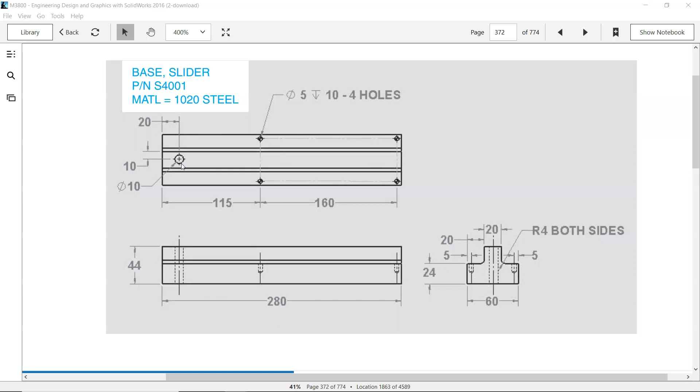We have the 4-hole spacing, the through hole, and we're going to create this line to line, but there's going to be some geometry that we're identifying as critical dimensions that we'll want to address.

So we'll go into a new metric part. If you haven't created a custom template for the part inch and the part millimeter, I still recommend that you do that.

We'll let this load, and then because of the orientation, I want it to be able to come into the assembly kind of like it looks in the isometric view or like it looked in the part. So we'll start the sketch on the right plane.

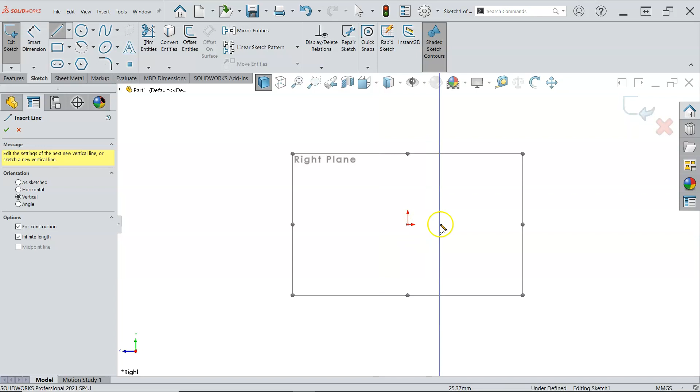Anytime I know I'm going to use symmetry, I'm going to go ahead and put in a center line. So line with a little arrow, grab the center line, vertical infinite length, so I won't ever run out. And then we're going to drop it on the origin and see that little yellow box for the coincident.

Getting out of it, I think I have better luck just going ahead and right-clicking and selecting, or hitting escape to get out of the command, rather than unpicking those buttons and trying to figure out what I'm doing.

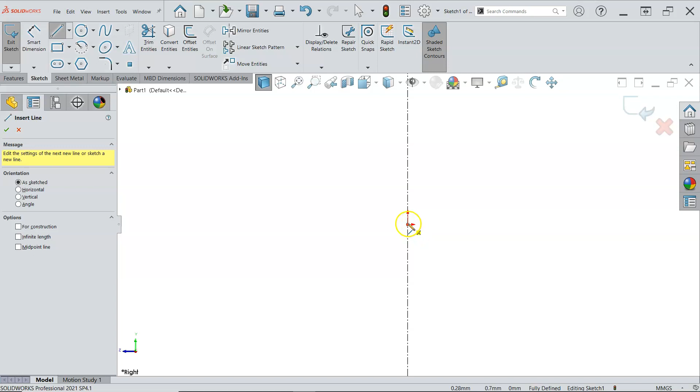So if I hit L on the keyboard, that will put me back in line as sketched, and then I can start drawing. I'm doing the click drag, so about there.

I'm loosely watching the dimensions, and we get back to that point. I can right click and select again, using the middle mouse wheel to zoom. I'll go ahead and complete the mirror.

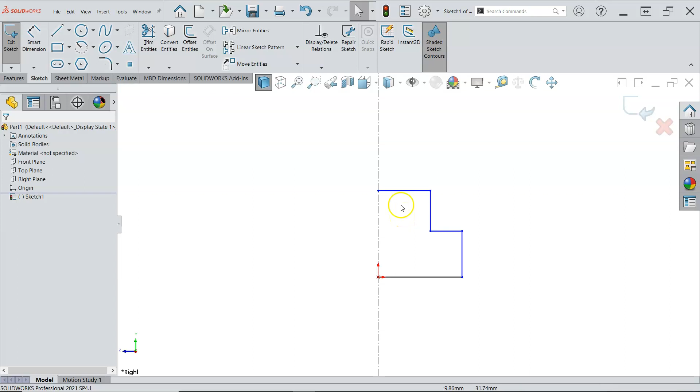So the center line has the functionality that if I were to revolve this, I would end up with a circular shape, but it also has the ability for the mirror.

So if I just click mirror, I have a habit of pre-selecting. So if I window picked from right to left and just hit mirror, I would get the mirrored objects pretty much instantly. It's not letting me window pick, so if I grab these

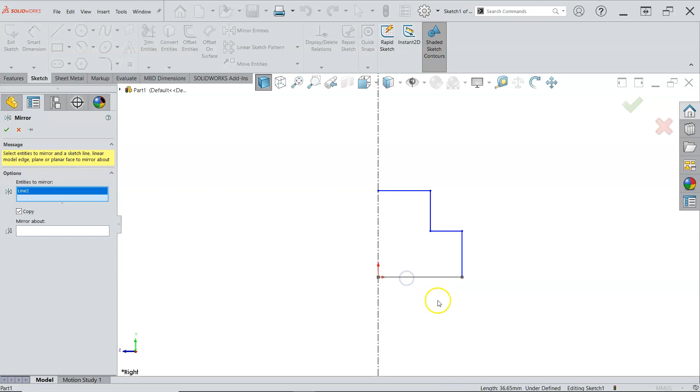single one at a time, make sure these are highlighting, and I'm going to mirror about.

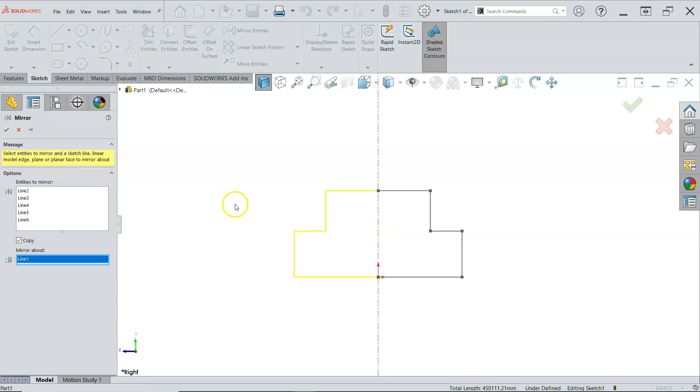One thing with the copy is if these already have dimensions and relations, the copy will bring it over and leave the original. Unchecking that will do away with all of this, and if there are dimensions and relations, do away with them as well. So be careful with unchecking the copy.

There's been times where, for whatever reason, I wanted it to go the other way, and rather than deleting this geometry, I would let it go ahead and copy, and then when I do the window pick, just change it to construction geometry if I wanted to retain it.

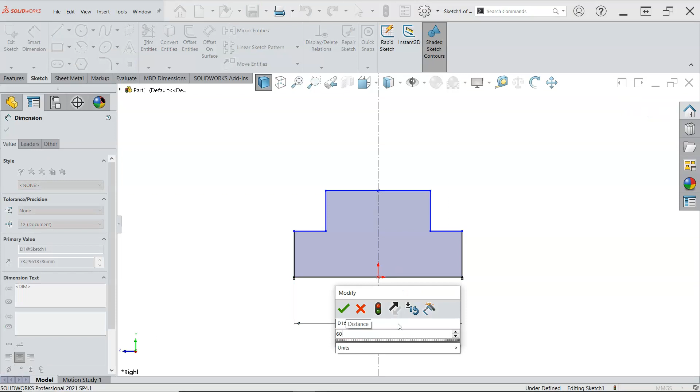So now I have my shapes. We're going to be 60 millimeters overall, and I'm not worried about the scale.

Let's see if my geometry, we go 24, and then the overall will be 44.

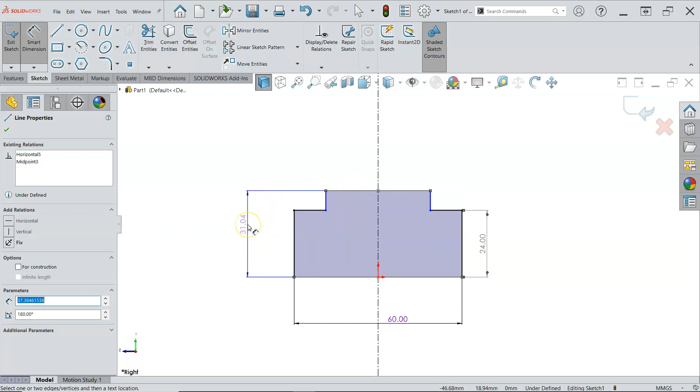So this is one of those instances when I'm picking dimensions, I like to pick the object first, and then second would be between two objects where it's not otherwise convenient.

In this case, we can pick on the object, 20 millimeters on the width, and that gets us a fully defined sketch.

So if I right click and go back into select, my next choice is, do I include the radiuses in the sketch? I don't think it adds anything, or that I need to generate that geometry right now.

So we'll just go into the features and extrude. The other one that I haven't gotten the habit of using is on the right click, the extruded boss base. Let's see, I was going to check the donut by holding the right mouse button down and dragging,

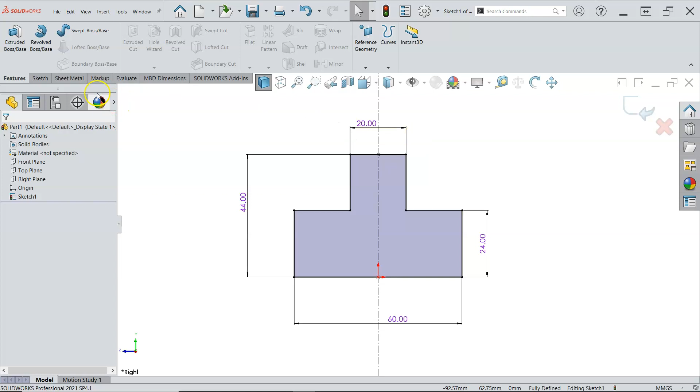and then the last one would be the S key. Somewhere I would maybe add it to the S key, but I'm not finding it except in those two spots.

So extruded boss base, it rotates around. Maybe I'll put this on the mid-plane just to have another end condition. So our overall is 280.

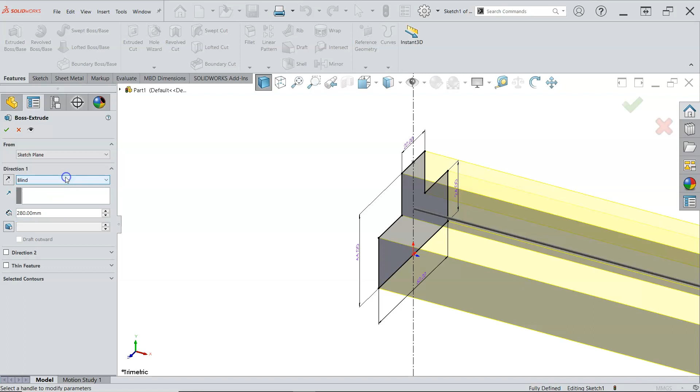And if I wanted to reverse it, I would toggle the arrows. We don't have a vertex, a surface, an offset from a surface, or another body, so midplane and blind are our two available end conditions.

So we'll go ahead and select that. These are on the sketch were shown with drill points, and rather than create those as a drill point, this is a good time to introduce the hole wizard.

So under the hole wizard, if I don't pre-select, when I get to its positions, it's going to ask me, and I need to tell this that I am in ANSI metric.

Okay, and it's not showing me metric because the pipe taps is selected, tapered tap. So I need to go to a standard hole. That one didn't jump out at me very clear, so now we'll be able to go to ANSI metric.

The dowel holes generate that little target symbol in the drawings. I know that they want these to be like press fits for the pins, but realistically we haven't gone through that process, so I'm going to stay with standard drill sizes and not worry about the fits and clearances. That is one thing with the dowel holes - they do have the H and G values that represent the press or the clearance.

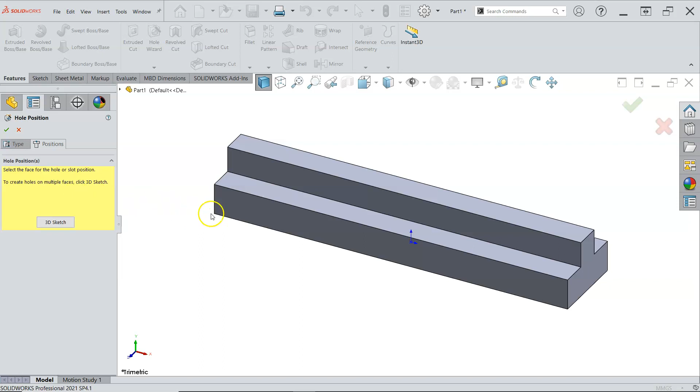Since I did not select the face that I wanted to start with, it's asking me if I want to create a 3D sketch, and no, we do not want to create a 3D sketch. So if I come out into the work area and pick, then it's going to put me into the point command, and I'm going to be able to select those geometries.

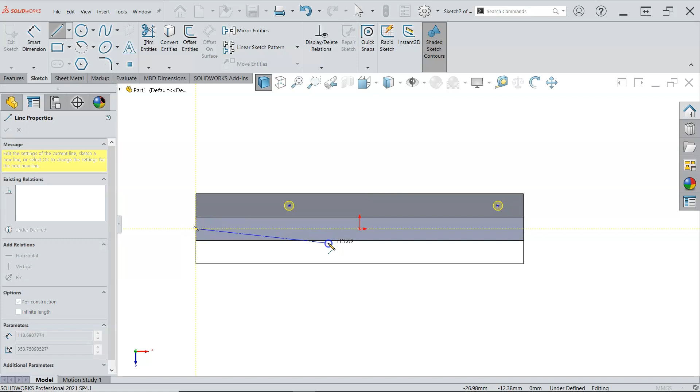Location - all right, so I'm only going to put in the 2 because I want to take advantage of the symmetry. All right, and if I come back and window pick, all right, so I have the 2 points. I have the center line going from midpoint to midpoint. I window picked everything so that it was selected, the line and the 2 points. And when I pick on the mirror, that's going to give me my geometry.

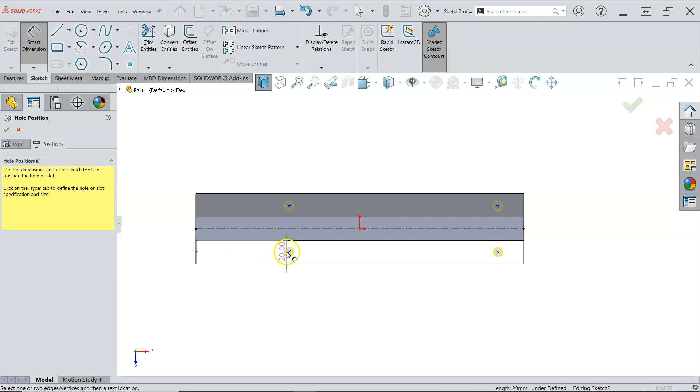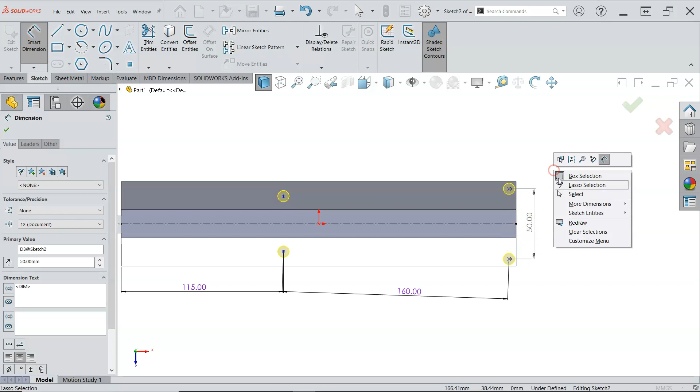So based on that, we are 115 from the end, and then 160 between the points. All right, and then if I do the math, I said I would rather be working from centers. On the off chance that I needed to grow or shrink this base, then the 5 millimeters would change, and in the assembly I would be injecting a possible error, at least until I corrected the little U-shape that was going to have this mating pattern.

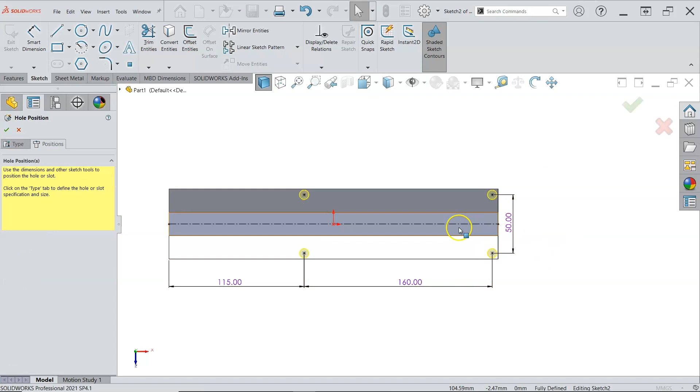All right, so my 160 linear jumped out, which tells me that if I drag this point, it can move. So I need a relation, and so if I select the point, hold down the control button, select the other point, then I can make that horizontal. That causes everything to go fully defined, and we can go ahead and hit OK.

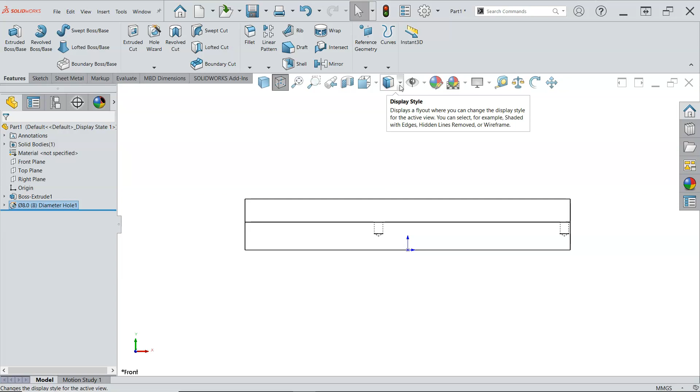And then if I look at this from the front view and switch over to, let's see where we go, wireframe, hidden lines visible, I'll see the depth of those pins and the drill point. So if I just put an extrude, that would be fine. It would draw the holes and extrude them 10 millimeters, but we lose some of that functionality, and the hole wizard most of the time will be a preference. It just depends on our decision process.

So let's do the hole wizard one more time. I like the S key. The hole wizard is located to be picked, and this is also going to be a simple hole. So our types, now that we've kind of run through it, we have the counterbore, the countersink, the simple standard hole, a tapped hole, the tapered pipe tap, and then it goes into the legacy.

So prior to 2004, you had to kind of manually enter in all of this geometry. There wasn't this extensive database, or at least it wasn't as functional. And then about 4 or 5 years ago, they added the counterbore slot and the countersink slot, and then the standard slot to be defined out of the hole wizard.

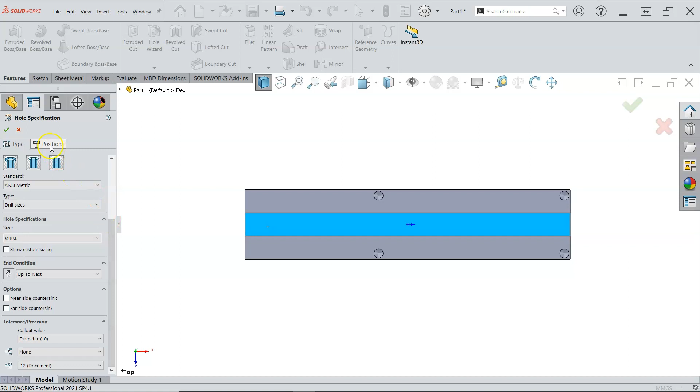So still metric in drill sizes, this being a 10 millimeter, we'll pick the 10 millimeters, and then this one can be up to next. No near side, far side countersinks unless something specific. And since I pre-selected, we're just going to place it on that face.

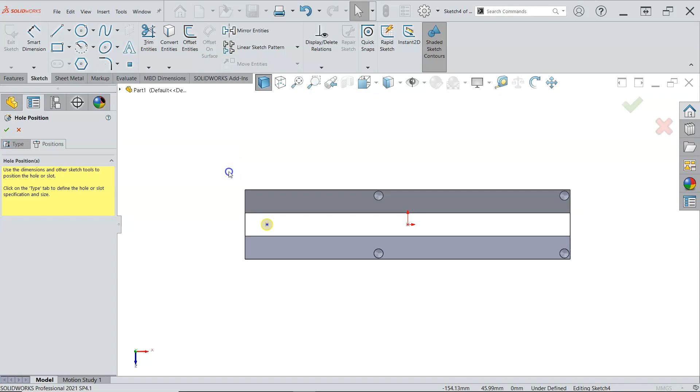And then select my point, control select the origin. That will center it by making it horizontal. Add the existing view the existing relations as horizontal. Then our distance is 20 millimeters off of the end of the part. And we pick the edge, pick the point, and place the dimension. Now we have the 20 millimeters. We'll go ahead and accept.

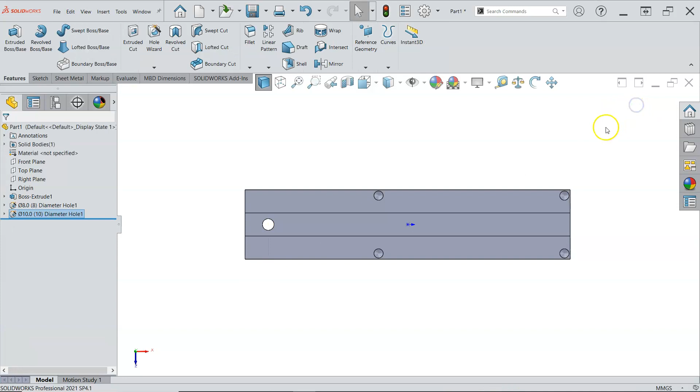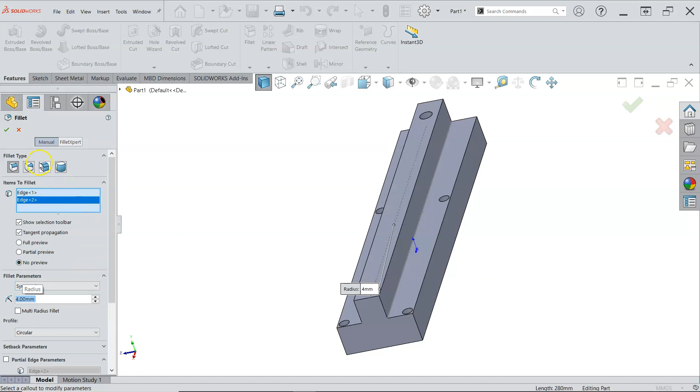All right, if I go to Control 7 to the isometric, I can right click and pick the fillet, which is the same as coming up to the command manager and going into the fillet. Middle mouse button will rotate around, select the joining edge, and I like to put in the radiuses and the chamfers, the fillets and the chamfers at the last. So we have 2 of those at 4 millimeters on the radius, and that completes our geometry.

So I want to save this, and we'll go into the assignment. I need a new folder for the assignment. It's going to be assignment 5.

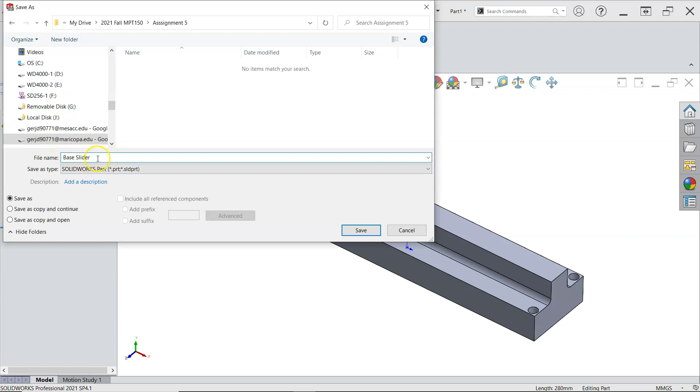And go ahead and pick our base - I don't usually put the commas in. If we have a lot of bases, then it's kind of the category first, and then the specific afterwards. Gives us something to work from.